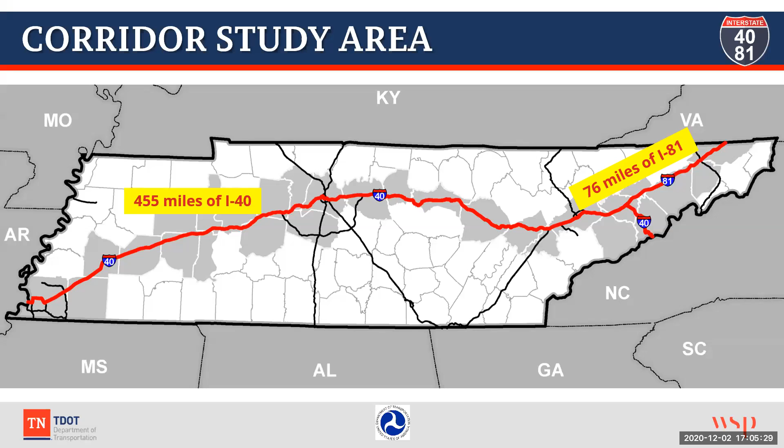And as you heard, this evening's meeting is focused on the portion of interstate that's located within TDOT's Region 1, running basically from Rockwood Mountain on the west up to Bristol at the Virginia state line on the east, and down to the North Carolina state line as you go through Cocke County. And we will be covering both I-40 and I-81 because Region 1 has both.

Here are the major types of solutions that we're going to talk about today for I-40 and I-81. First would be highway expansion. That could include new lanes, it could include interchange upgrades, or just ramp improvements at interchanges. We will talk about safety solutions, both on the I-40 and 81 corridor itself, and also on the main detour routes for the interstate. We'll talk about something we lovingly refer to as TSMO, which is Transportation Systems Management and Operation. That's an approach to managing the existing system more efficiently rather than adding physical capacity.

We'll have solutions related to freight, ways to promote safer and more efficient travel of goods across the state. And we'll talk about transit, ways to make sure we're providing options for people who either can't or don't want to drive, especially looking between regions of the state and across Tennessee.

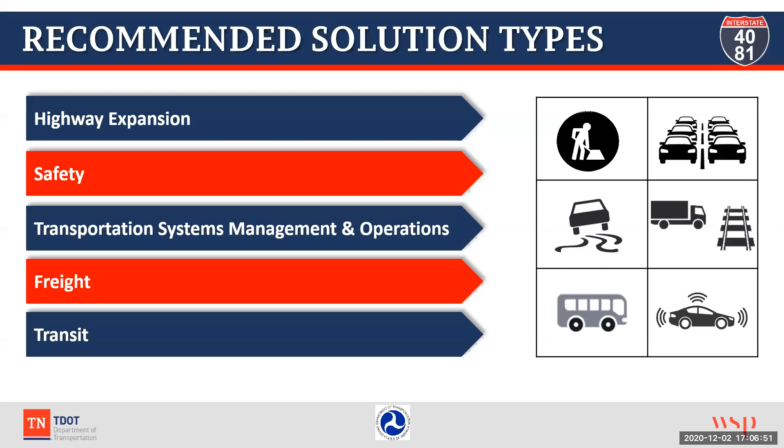Now, even before this study began, there were already some projects identified for I-40/81 through the IMPROVE Act that was passed by the Tennessee General Assembly a few years ago in association with a gas tax increase to be used to pay for those projects. And here on this slide, you see the projects in the IMPROVE Act within TDOT's Region 1. They include I-81 widening in Jefferson County between exits 1 and 4, a future interchange in Cocke County in the area of O'Neil Road, and then some interchange improvements in the downtown Knoxville area, partly at I-275, but also probably extending to looking at the area of I-40/640 on the west side of 640.

While all of these projects are technically in development, some will likely happen sooner than others. But regardless of when they occur, it's really important to keep the context that these projects are on the books when we're looking at other improvements to the corridor like we will be today.

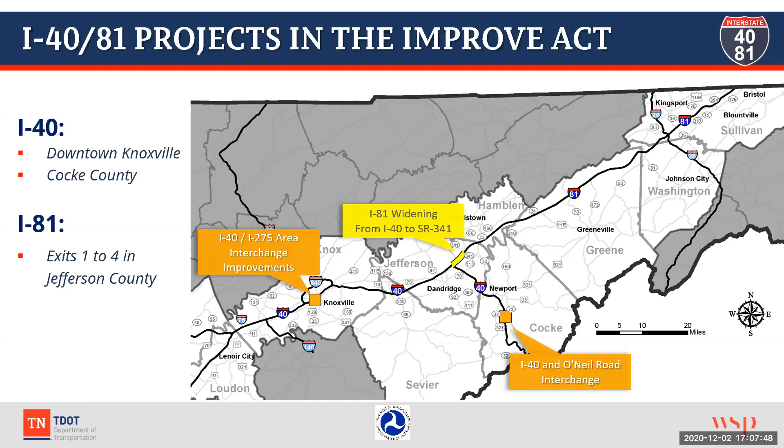So there are a lot of recommendations on this map, and in particular, if you can see my mouse moving, there are a lot of recommendations in Knoxville, in Knox County. So we'll come back to that area in a couple of minutes with a larger map. But let's start with this one. At the far left of the map, this yellow dot you see with the legend up there, yellow is potential interchange improvements. And we're distinguishing that between potential interchange improvements and potential ramp improvements. An interchange improvement could be replacing the interchange with an actual different kind of interchange, whereas ramp improvements might be something like, well, this ramp needs 2 lanes instead of 1, or we need to change the way the ramp intersects when you get down to the arterial road. So that would be the difference there between the yellow and the blue.

At the far left, this yellow dot in Roane County is a recommended interchange improvement at exit 347, which is Harriman, to reconfigure it to provide better operations and safety. I said we'll come back to Knoxville in a minute.

So as we move east into Jefferson County, we've carried over the projects from the previous page that you saw. For instance, we're showing with the yellow line that there's already a widening proposed on I-81 between exits 1 and 4. But we are also, with this study, recommending some geometric and operational improvements at exit 421, which is where I-40 splits off southward toward North Carolina and I-81 begins. There were some improvements made to that interchange about 10 years ago as a result of TDOT's first I-40/81 study, but there is still room for improvement.

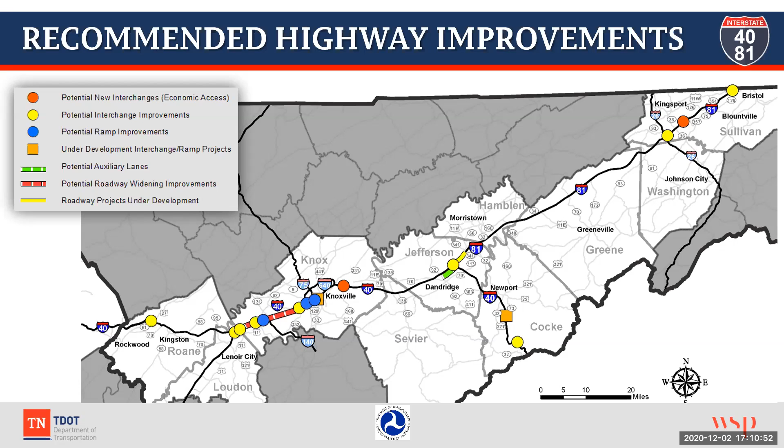The reddish orangish dot up here indicates a potential new interchange in the future in the Kingsport area around I-81 and Buttermilk Road. That was identified as a potential future access point to I-81 through other local and regional transportation planning efforts. So that covers the improvements on this map other than what's in Knox County.

I'll now switch to a map that zooms in a little further on the Knoxville area of I-40. You see quite a long list here. And again, we won't get into the weeds, but if one of these needs a little more explanation, please go ahead and feel free to type the questions in to the box. And I do have a member of the team that can probably address that pretty well.

So let us know. Starting at the west end, you see proposed interchange upgrades at 369 and 373, which is Watt Road and Campbell Station Road. Both of those, particularly Campbell Station Road, very short ramps, hard to safely merge and exit. Also, you see in red a proposed widening all the way from the I-75 junction over to Lovell Road at exit 374. Then proposing additional widening from Lovell Road up to the western terminus of 640 at exit 385.

And then here's one to extend the westbound lanes from Alcoa Highway as you're getting on, so that one lane will ultimately exit to 640 and one lane would continue through on 40. This whole area is an area that does repeatedly bog down, and this is something we feel would improve traffic flow. In addition, when you're on the eastbound side in the Paper Mill area, proposed here is a separation of the eastbound traffic, so between Paper Mill and 640.

So there are some folks getting on right now at Paper Mill that want to merge all the way over instead of getting off at 640, and the weaving motion is just creating a lot of congestion and safety issues. So one potential solution there would be to separate traffic so that if you come on at Paper Mill, you're going to end up exiting onto 640. Going back to the west part of the county, also proposing to improve off ramps at Lovell Road and at 640. And then you also see a proposed ramp improvement for the Western Avenue interchange.

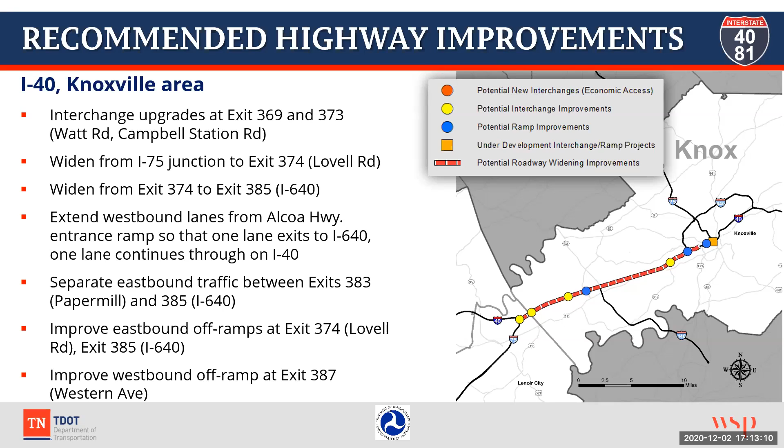Now, you might think this is just a nice thing for people who happen to get a flat tire or get involved in a wreck, but all of us who drive I-40, 81 are actually benefiting when those people get helped, because every time there's a primary incident, there's a high chance that there's going to be a secondary incident. For example, if there's a crash ahead, you're probably going to get vehicles that are just in front of you that are slowing down or even stopped. And a driver who isn't paying attention will end up rear-ending the stopped vehicles in front of them.

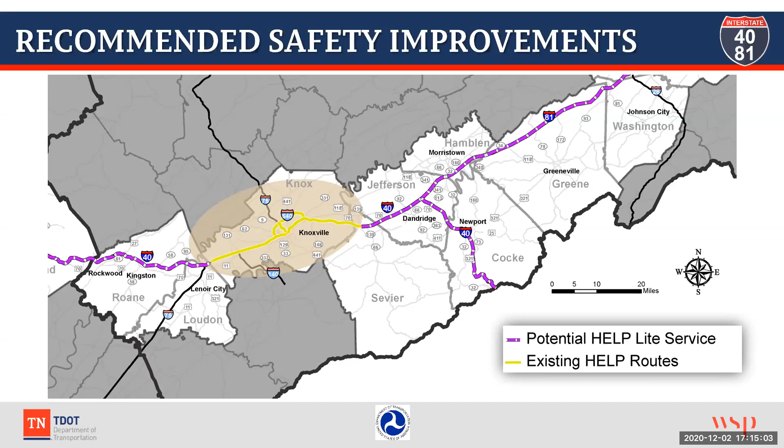Here's the next major area of safety improvement, and that would be the construction of truck climbing lanes and potentially runaway truck ramps in certain parts of the corridor where there are steep grades. One reason we look at truck climbing lanes as a safety project is because it creates more traffic conflict when vehicles on the same stretch of road are operating at really different speeds. And on a steep grade, as you're well aware, a heavy truck could be going at least 20 to 30 miles an hour slower than the cars next to it. So truck climbing lanes can do a good bit, not just for traffic flow, but for safety.

And you see here on this slide the locations where truck climbing lanes should be evaluated on 40 and 81. Now I'll say these are approximate areas. Some of these lengths are fairly long. There would not likely be a truck climbing lane that's actually 7 miles long, but this is where they should be evaluated, and it will take a little bit of additional engineering to determine exactly where it should be located.

There are currently no truck runaway ramps that I'm aware of on 40 other than nearby in North Carolina, for those of you who drive down Old Fort Mountain. And goodness hopes no one would ever need one. But truck incidents certainly take longer to clear than any others, and they have the potential to be really devastating. So it's something that could at least be considered.

So you see here the locations that are being proposed for evaluation are primarily in this rolling area as you come down off Rockwood Mountain into the Rockwood, Harriman, Kingston area. And then on 81 in Upper East Tennessee, a climbing lane on 81 in the vicinity of mile markers 15 to 23, and then again around 48 to 51 mile markers.

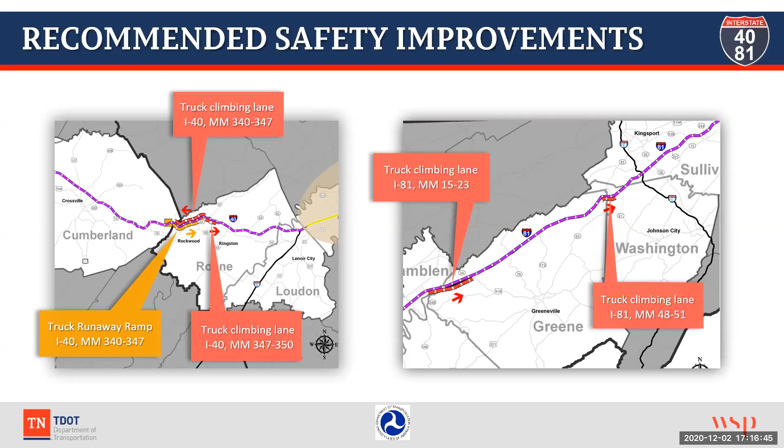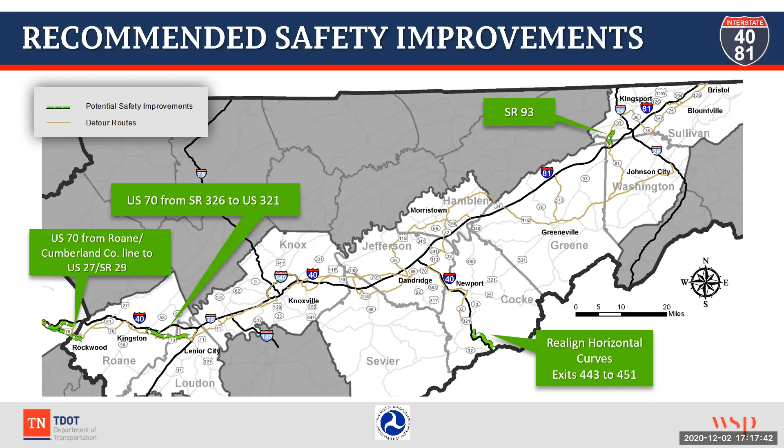Nobody's proposing these routes would be upgraded to interstate standards, but there are certainly some spots along these routes that could be beefed up to help reduce the amount of impact and maybe improve safety during those occasional times when traffic has to be diverted. And I believe since the time we started the study, the State Route 93 improvement may already have been completed. So good, we got a quick win.

All right, let's go to management and operations of transportation. What is it? Well, first of all, it's a chance to maximize the efficiency of what we've already got. And that could involve technology, but it doesn't always have to. And I'll give an example in just a minute. In a lot of cases, it can delay the need to physically expand the facility. At some point, if growth continues to happen, you probably will need to add a lane. But a lot of times you can get by for quite a while just by managing what you've got. There are a lot of different strategies out there that fall into this category. The 4 that I'll highlight here, the first one is real-time traveler information.

And that is an example of something that doesn't really require technology. Real-time traveler information has been around since radio stations first began providing traffic reports, but it's just gotten more sophisticated over time. I'm sure a lot of you are aware that TDOT now has its SMARTWAY system that can give you real-time traffic and weather by phone or looking at maps on their website or a smartphone app.

A next one to talk about is called ICM, which is Integrated Corridor Management. That's an approach to manage movement in a corridor by balancing traffic among the various routes and modes that are available. And to some extent, this is already happening. In the old days, the traffic reporter would suggest an alternate route, which is a way of integrating the management of the corridor. A more modern example would be Waze. If you're using Waze in your car, it tells you to reroute.

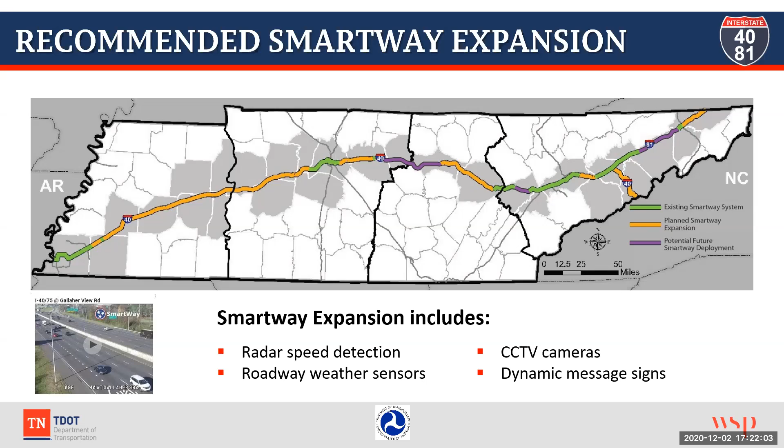So this kind of technology is really going to help support coordination with TDOT when traffic needs to be shifted between I-40 and the alternate. So steps like that make ICM more feasible.

The other thing recommended here is looking at ramp metering for a portion of I-40, generally between the Lovell Road interchange and downtown Knoxville. We think this would probably provide better mobility for the corridor than a managed lane like an HOV or an HOT lane would, but further analysis would be needed before implementing anything.

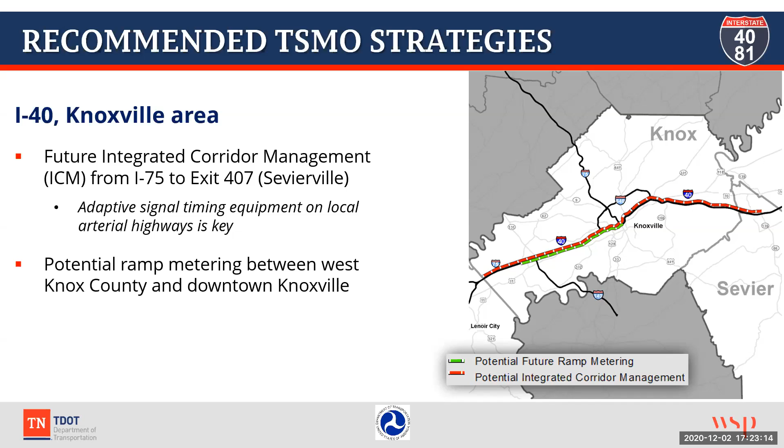There's other technology available too that can help traffic flow and safety along the corridor, and that relates to heavy trucks. I think all of us are probably aware of how the weigh stations on I-40 and 81 affect traffic operations because trucks that are leaving the weigh station are trying to merge back out onto the highway at a pretty slow speed. And when the sites in West Knoxville and up in Greene County were originally selected for these weigh stations, they weren't as close to urban areas as they are now after a lot of decades of growth. So the impacts are becoming a lot more noticeable.

There's something called weigh in motion. Those devices and sensors provide an opportunity to improve the efficiency of weigh stations. They can record truck axle weights and gross vehicle weights without actually requiring trucks to make a complete stop, which is a much more efficient process than a static weigh station.

In addition, this technology gives an opportunity to collect data on traffic volumes, axle spacings for trucks, vehicle classification, and speeds. And that kind of data can help TDOT a lot with pavement and bridge design, enforcement, and even planning studies related to truck size and weight. So there's a lot of potential benefits here.

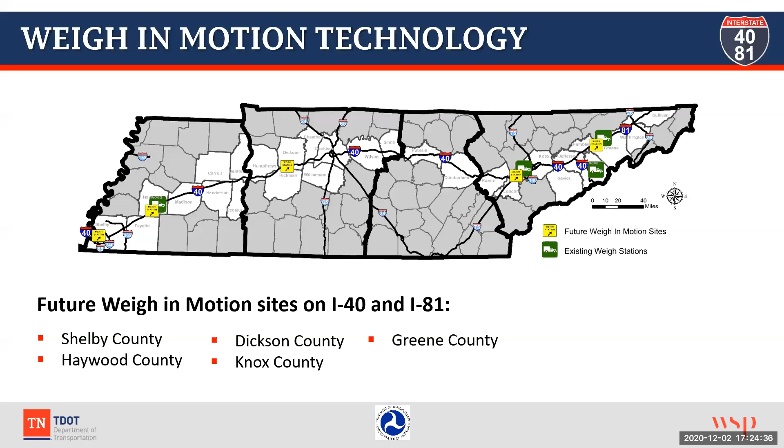And what you see on this slide is that TDOT's already been looking at the weigh stations across the state and selecting certain ones to pilot this technology. And you see that both Knoxville and the Greene County weigh stations are proposed for that. And I think that they're already in development.

And although trucks are a lot cleaner than they used to be, they still contribute most of the air pollution that's related to traffic. So going electric can be good for our health, in addition to conserving those non-renewable resources. Regardless, though, of whether your electric vehicle is a car or a truck, you're more likely to use one if you know that you can count on finding a charging station when you need it.

There are fast charging stations available to the public at least every 50 miles. Those stations are no further than 5 miles off of the corridor. And they're equipped with multiple connector types. And one reason that's important is because the technology is still continuing to evolve and it's not completely standardized. And if you're like me and you have 8 different kinds of cords to charge your phone, you know exactly what I'm talking about.

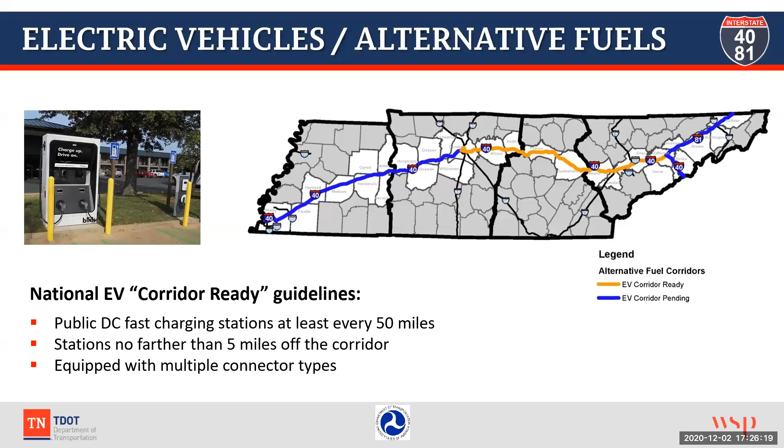Now, talking about transit, I-40 and I-81 play a really important role in transit service in several different contexts across the state. First and foremost, I would say they are critical to operations for rural public transit agencies. They provide daily service to citizens that are traveling to and from larger urban areas, mostly for medical appointments, but also for other services and for jobs.

And I want to point out that transit agencies, the operators of those buses, and their riders can actually benefit from a lot of the same infrastructure improvements that we have presented in other slides. Any projects to improve traffic congestion in urban areas will keep those vehicles from having to wait in the same traffic. Things like truck climbing lanes are going to be of assistance, either because a bus needs to be able to go more slowly without getting run over, or in some cases, if it's able to pass a truck, it's benefiting from that truck climbing lane.

And finally, but most important perhaps, is improvements to interchanges that have tight ramps or short ramps, because the challenges related to steering a bus are actually pretty similar to the challenges facing truckers. So these physical improvements can be beneficial to transit as well. There's another major opportunity that's been identified through this study, and it's for TDOT and those local transit agencies to partner on the creation of future park and ride lots along the corridor.